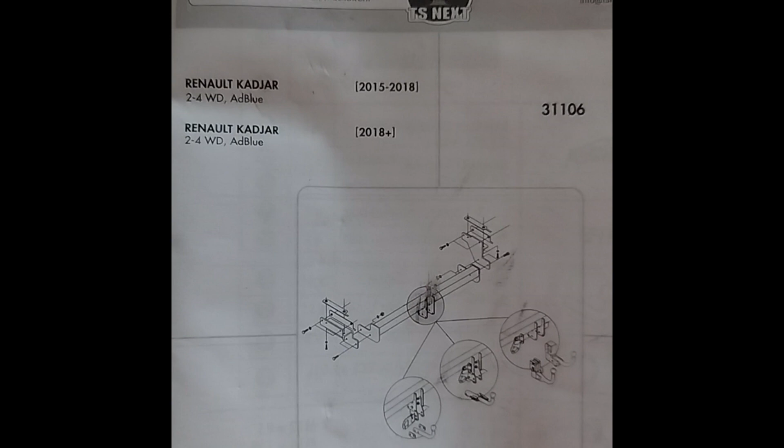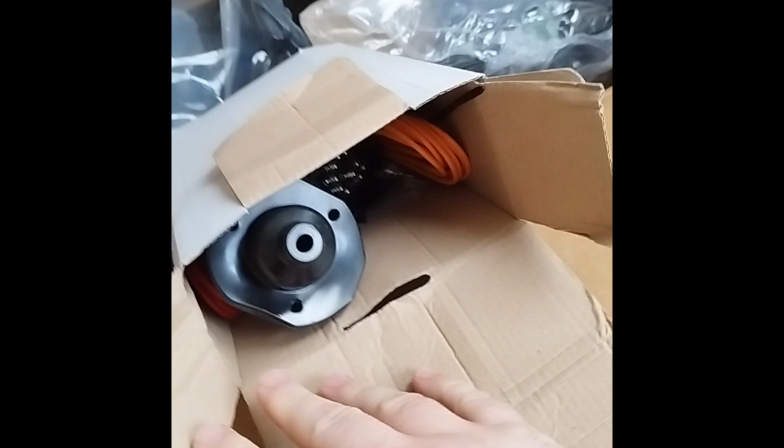Found these on eBay and on the Renault Kadjar Facebook group. Somebody had this fitted by a professional installer without a bumper cut, so I ordered it up. It's quite a lot cheaper than a lot of the other stuff. Came from Italy, it was £180. Came with everything you need basically to get started. I was really impressed, it came within a week. Comes with all of the electrics and CAN bus and everything, but I'll probably not do that in this video today because I'm under a bit of time pressure to get it taken apart and put back together again before I pick up the wife and kids.

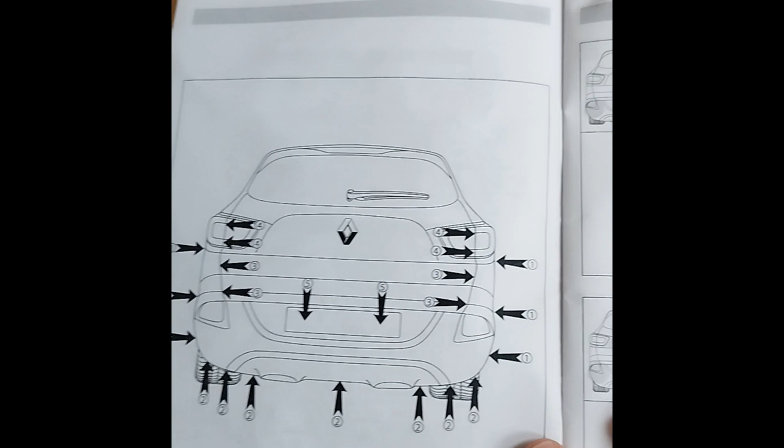So I'll do the electrics separately, I think. Put that out the road just now. But yeah, the instructions actually look pretty decent. People have said that the instructions aren't that great, but I can see it seems very well laid out. Sorry, just getting to the right page, but it's got a picture of the Renault Kadjar, shows you where all the screws are, what you need to do, so let's get on with it.

First job is to get the light off, and I think it's just these two screws here, but it does imply that there's a screw in the side, so we'll find out. Looks like star drivers, so yep. So there was a sneaky wee hand screw in the side of here, see that? Focus it in, yeah, that there, it screws onto that thread there.

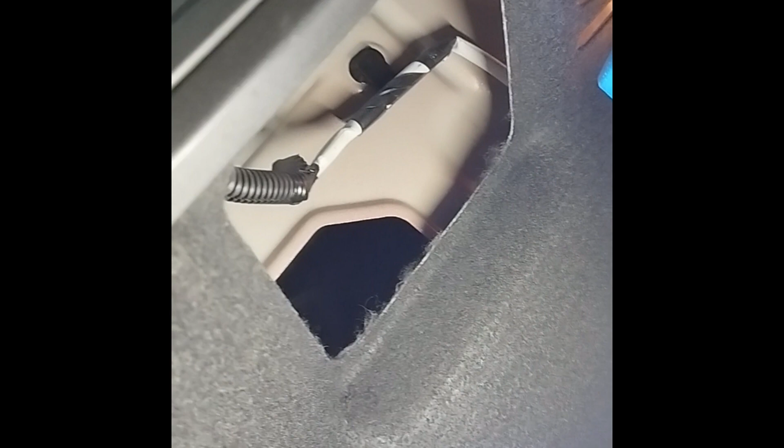So I just unscrewed that over there and it just came out the top of that hole there, so that's good. I've taken the opportunity to clean inside of the light bays there with some wet wipes, and the back of the lights just - oh boy, in a rush to put it back together again, so get rid of some of that stuff in there. Yeah, going to be very methodical. The screws for the lights are going in this empty toolbox I've got, so that's the screws for the LED lights, and then next I need to take out all the screws and pop rivet things.

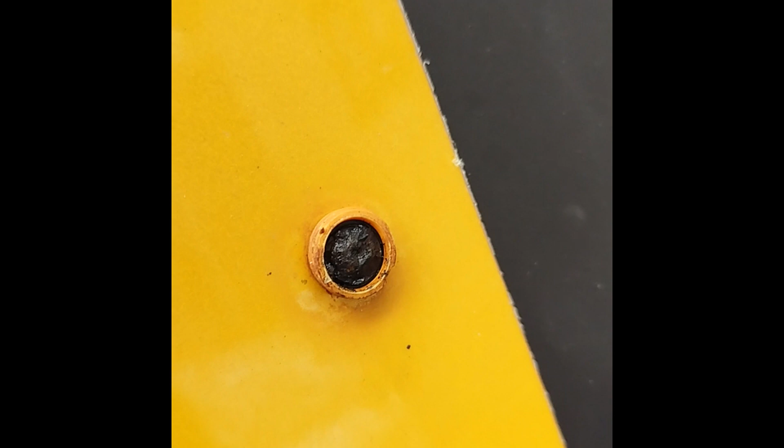Okay, so there's screws behind the bumper plate, so that's coming off next. It's always something that comes up to slow you down, so feckin' glad I started with the number plate. It's completely rusted on, there's no head on the bloody screw. It's completely rusted away, both sides.

So I managed to get one of the screws out and swivel it out the road. That's the two screws out of the bottom here. I am thinking the rest of the screws are underneath. I don't know if you can see that. I was thinking about jacking it up. I may yet do that just to make it easier.

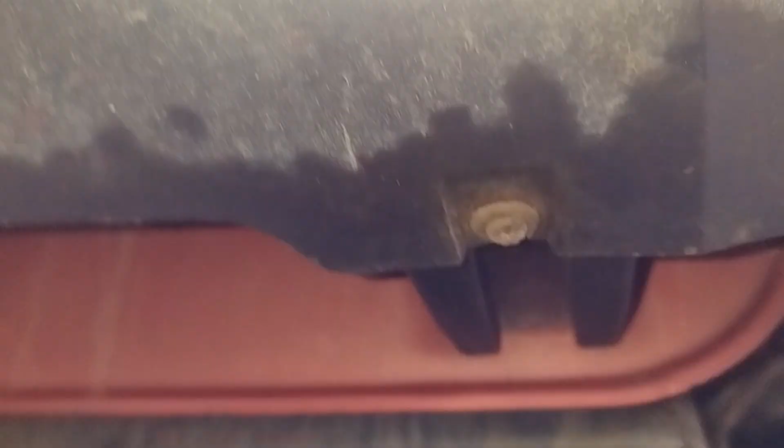So I've got the same problem underneath. I've got one screw out, but the first one I did came out fine, the rest are just corroded to shit. I'm going to have to get new ones before I carry on with this job. So yeah, top tip, make sure you're going to need some - it's a T25 Torx. So you need some machine screws to replace these ones, because unless there's ones in the car with a kit - let's go and have a look.

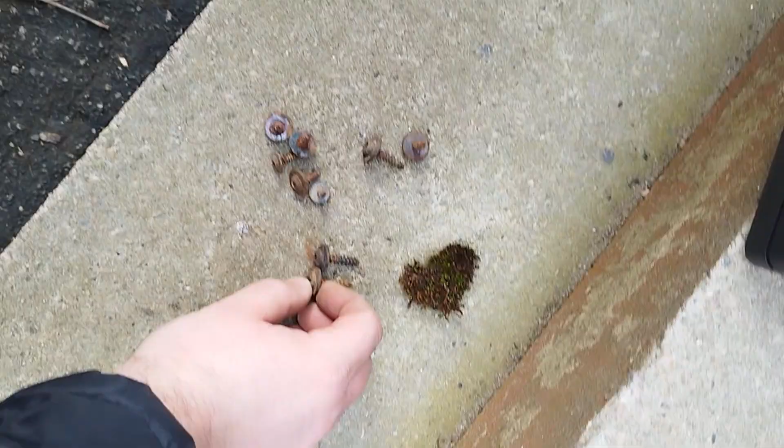Right, that was harder than expected. These are totally rotten. So the four bigger screws go at the edges connecting the wheel arches to the bumper, and these wee ones connect the bumper to the bottom. They are pretty rotten, I had to drill a couple out. Get in there. So I believe I've got all the screws out, I just took the last six out here, so it's a case of peeling it apart.

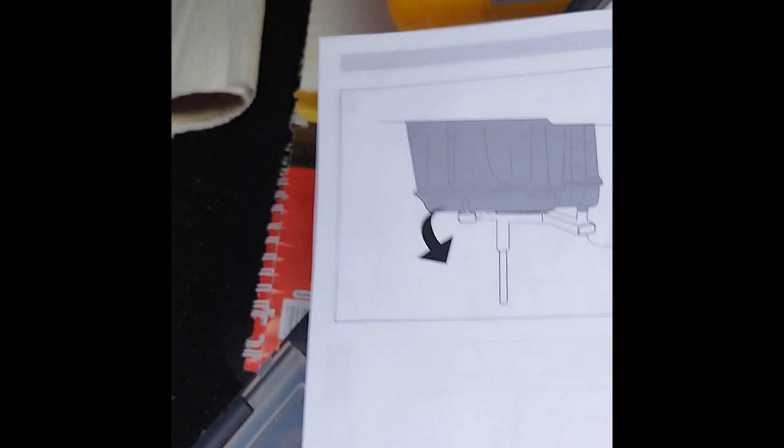Now the instructions are pretty good up until here, and then suddenly there's nothing about removing it. This is something about AdBlue, but I don't know what that is. But according to videos I've seen on YouTube, you basically start popping the wheel arch trim off first, and yeah, go from there. So let's try that. That was actually quite straightforward.

Got the big Bertha screwdriver in there, popped it out. You can see there's a clip, so like just here and just here. Get that off, and that's that out. That's as far as I need to take it. Do the same other side. Even quite tough to get off. I've got it off there, but it's pretty tight.

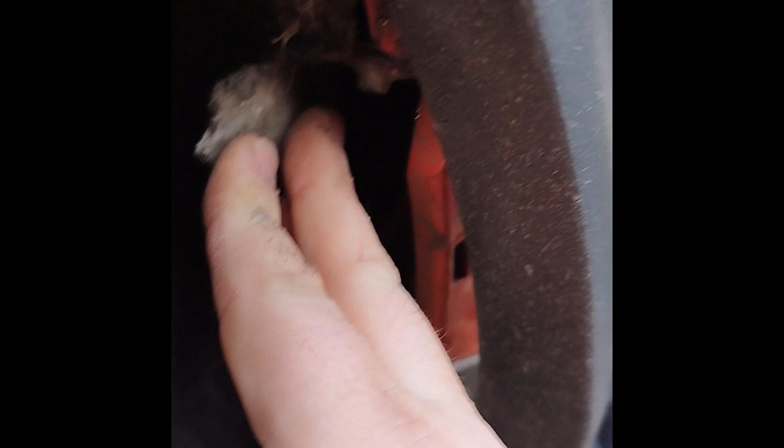It looks to me like there's another screw there holding that on. I can take it off. Yeah, a wee 7mm bolt in there just to catch it off guard. Actually, it's a star on the other side, so that means this bumper's been off before.

I did think that it maybe had a wee shunt. Matt Armstrong, you would be saying car vertical, but I've had this car for a few years. I'm pretty happy with it. The reason I'm putting a towbar on it is because I want to keep it a bit longer.

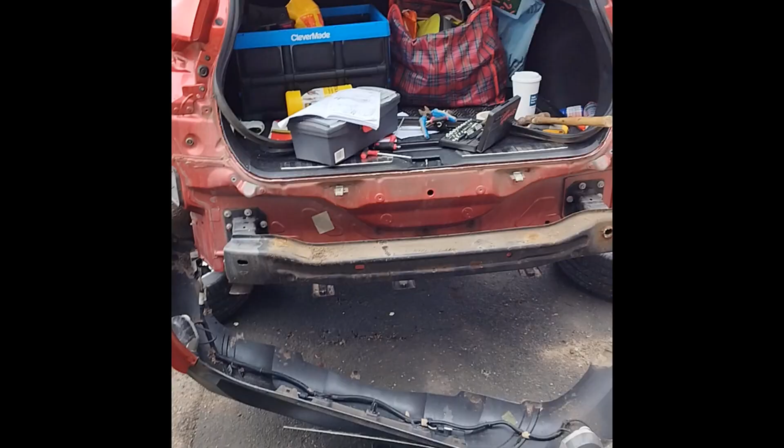They were difficult, seized up again as well. There was one last screw that doesn't want to come off, but it's kind of sitting there, so for all the hassle it will be to get it off, it's not in my way now. I've got access to the bit that I need to get access to, so we're good to go.

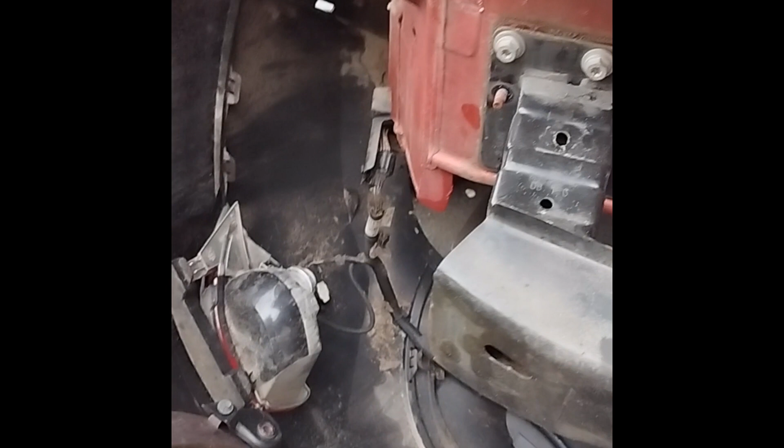Alright, it's pretty hard work. There's like 6 screws instead of 3 in the diagram. One of these actually shore off, so 1, 2, 3, well, yeah, 6 seized, fairly tight screws. Put a bit of WD-40 on it.

Right, now that that's off, we're now onto the jigsaw puzzle that is the Umbra towbar. Note to self, I should have used the box to lay on, save my back getting cold. Top tip, jack it up, use the box to lie on.

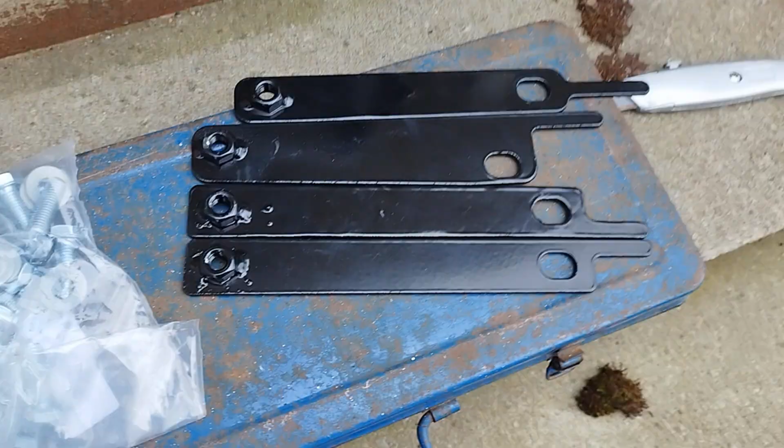Do that, so they two are the same. But that one's different, that's really concerning, because I would have thought they would be symmetrical.

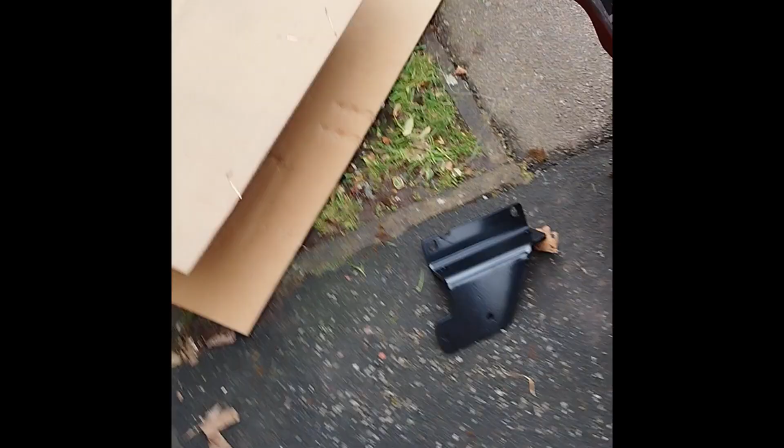Alright, I figured it out, because there is a right hand side, as you can see there. So this is the right hand side, and that's the left hand side, or the driver's side. And what I'm doing is, I'm guessing that that goes to the back so that I can screw into there and a bolt on top.

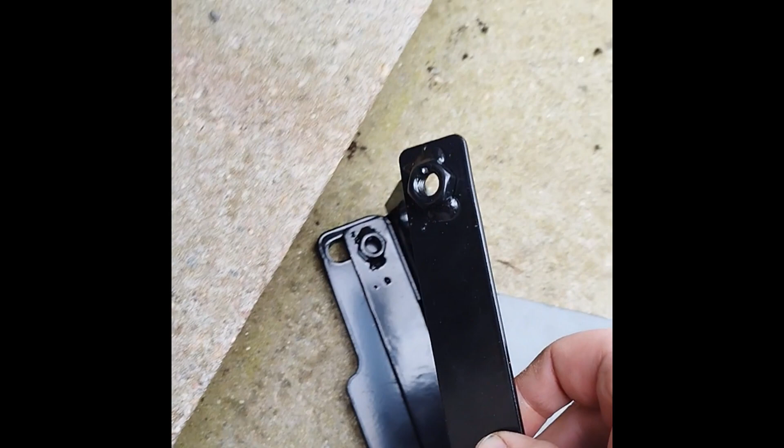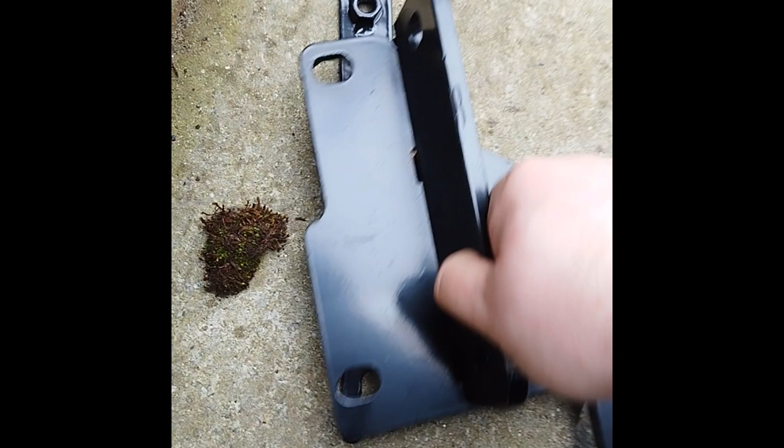So I do that with those two, they don't match. So they must be passenger side. I'm going to put that on there like that. It matches. On the other side it does as well.

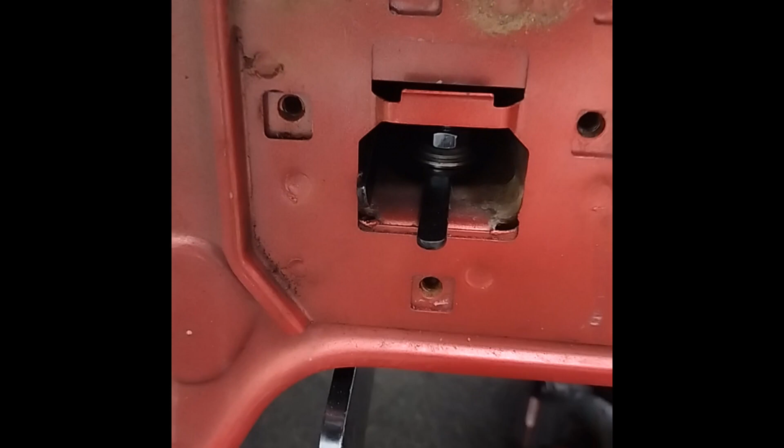Okay, it's going to be a bitch to get on, but let's give it a go. Right, that's one on. There's a bit of a footer. I eventually got on. This is the odd shaped one because there's a bit of an angle, and that's a straight one. So yeah, like you say, I've left it a wee bit fairly tight at the back, but loose at the front. I'll do the other side.

I might now be regretting leaving the bumper attached because it's... And I'm glad I jacked it up because it gives me extra space underneath, but I think I might have to take the bumper off to get full access at this now.

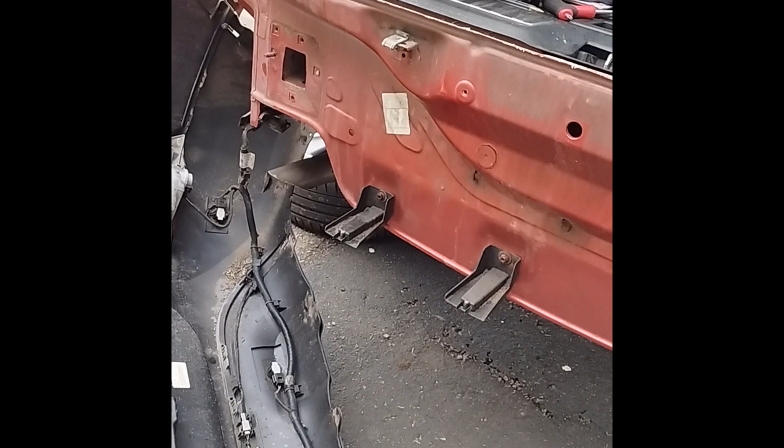Alright, I've got the other side in, it's not fully tightened, that's just loose. I think that's the right way around for that. So I see there, I've just fitted it in, nothing's tightened up, just checking it all for fit. Looks like it's going to work. This is a wee bit close. But yeah, okay, that's good.

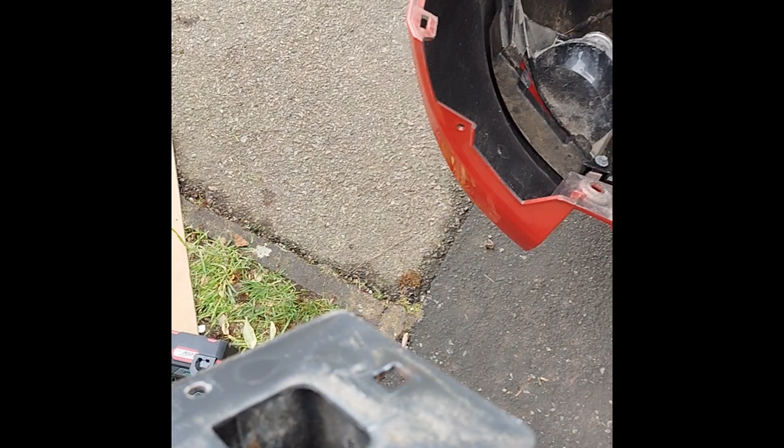And again, before I tighten it all up and secure it, just making sure the crash bar goes back on. It's not quite, as you can see there's a wee bit of a loop, but those wee lugs are more just to help you lever it around to get the back bolt on. So once I've tightened it up, I'll just hit them with a hammer and bend them out of the way. That should do the job. Right, I've kind of got it all tightened up now.

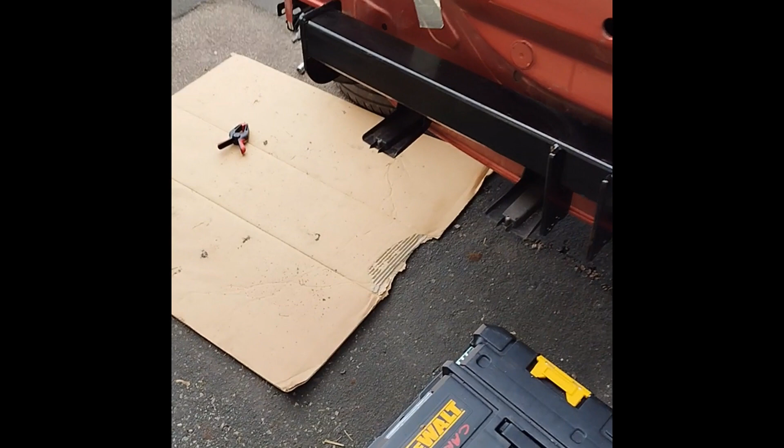The impact wrench comes in handy, but you kind of get all the way. The bumper fell off eventually anyway, kind of needed it out the road to get that bit tightened up. I can see that they've bent in anyway when I've tightened them up all the way, so they might be out the road now.

Right, so that bumper impact thing went on no bother. It's just a case of putting it back together now, I think. It hasn't mentioned much about fitting the actual tow bar thing, which is in this part.

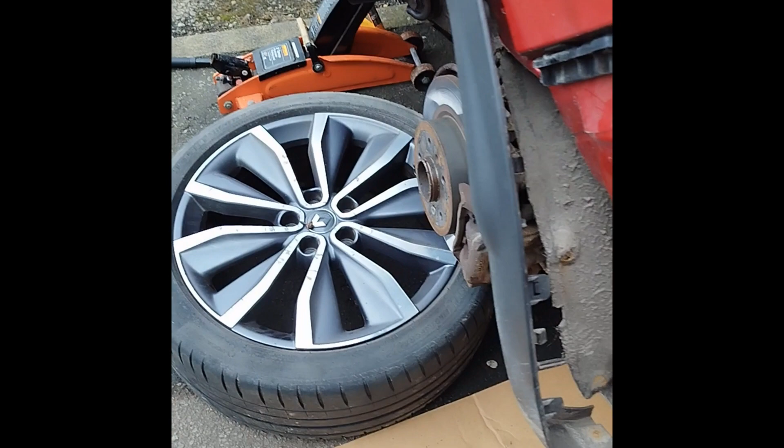Probably, I'm just going to push the electrics through, there's a wee grommet thing here. I'm assuming that goes through, so I'm going to push it all through there. I saw in Jim's shed you can pull out all that gubbins and get into that, so I'll push it all in there for just now.

Hopefully I won't have to take it off again, but I'm pretty sure that's the way into the car. It's got a wee thing, so I'll put a slit in that, push it in through there. That's what I think. Yeah, there's literally no instructions on how the last wee bit goes together.

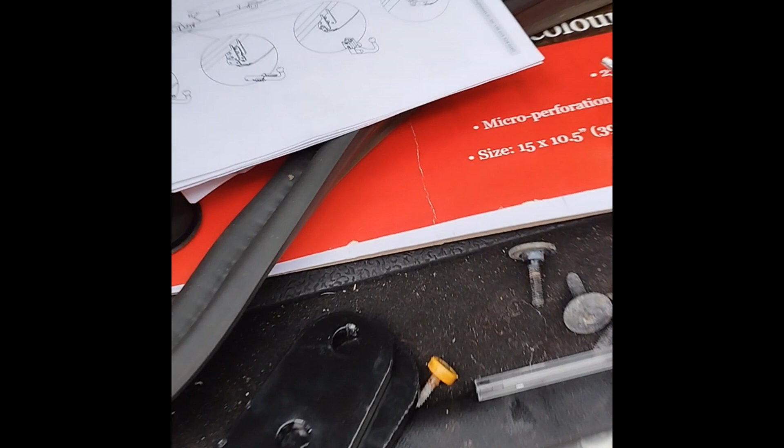I'm pretty tired now. I've got to put the car back together. So what I'm going to do is just put the wiring loom. I mean, that's literally it, but I can't see. Maybe I'm just tired, but I can't really see.

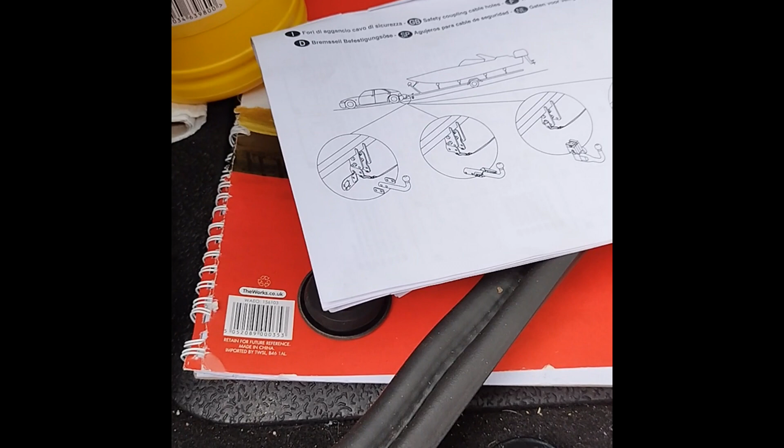Oh yeah, that thread's in there. Okay, maybe it does go in there like that. So that's got threads on it.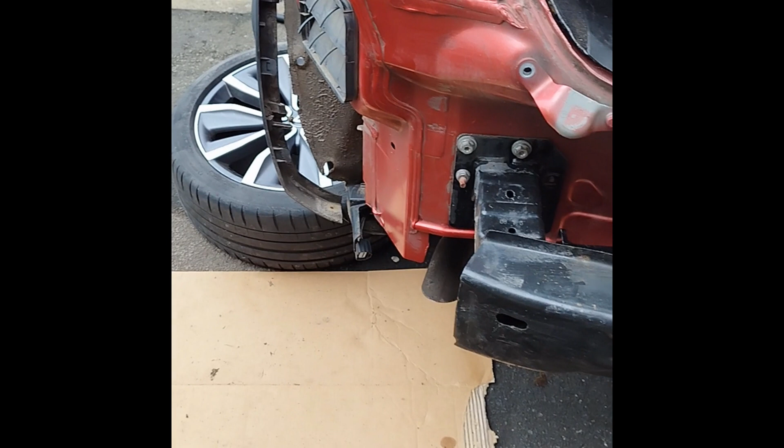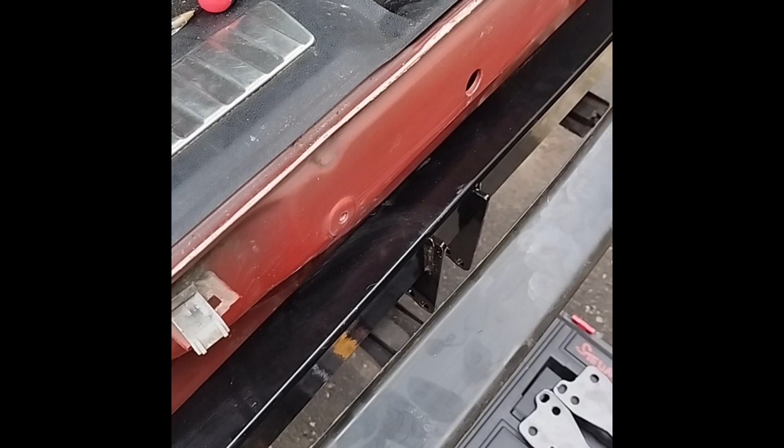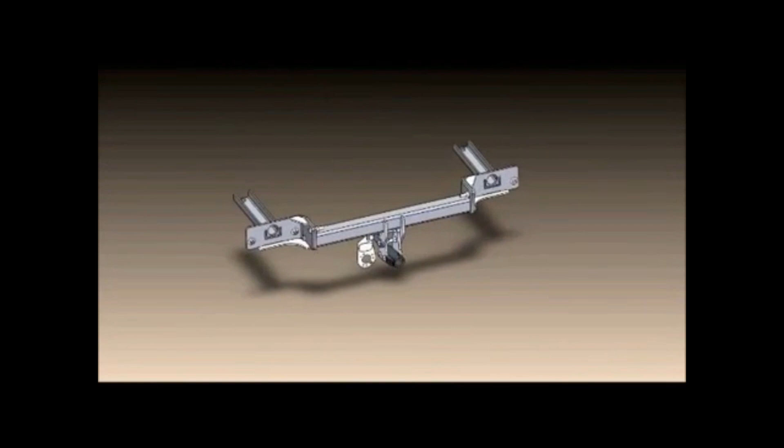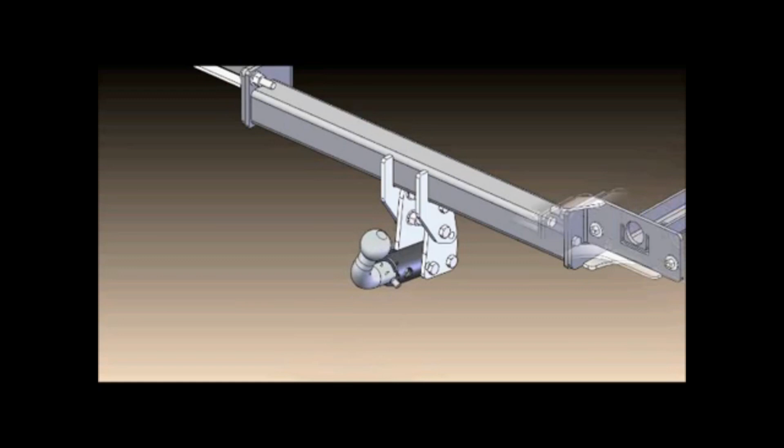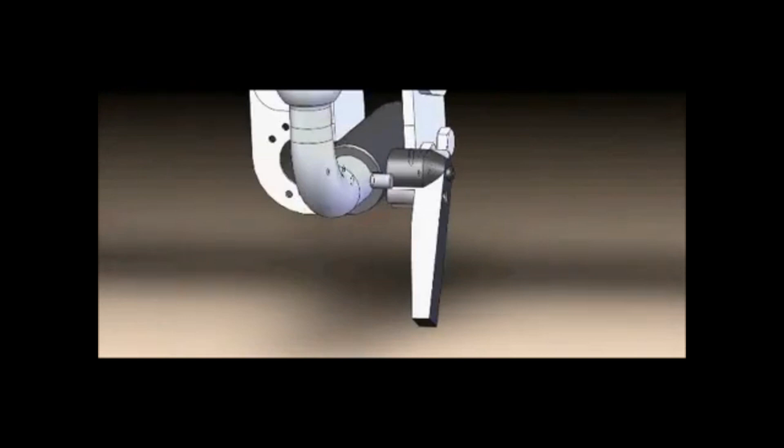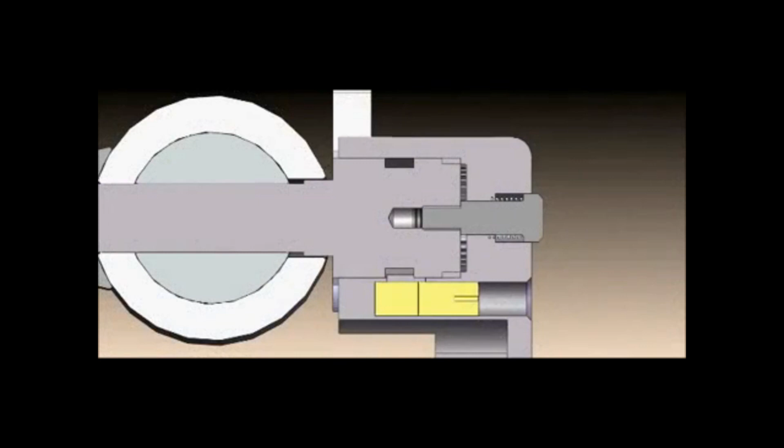So putting the actual detachable tow bar piece on wasn't too bad in the end, and I'm quite pleased with it. One thing I watched on another video was that some guys recommended removing the paintwork from the tow ball so you get a better clamp on the ball head, so we'll check that out at some point. Unfortunately I wasn't able to do that, so I put the bumper back on.

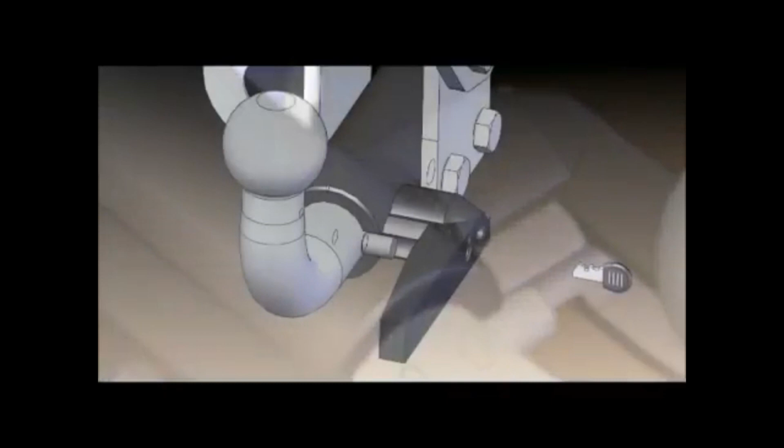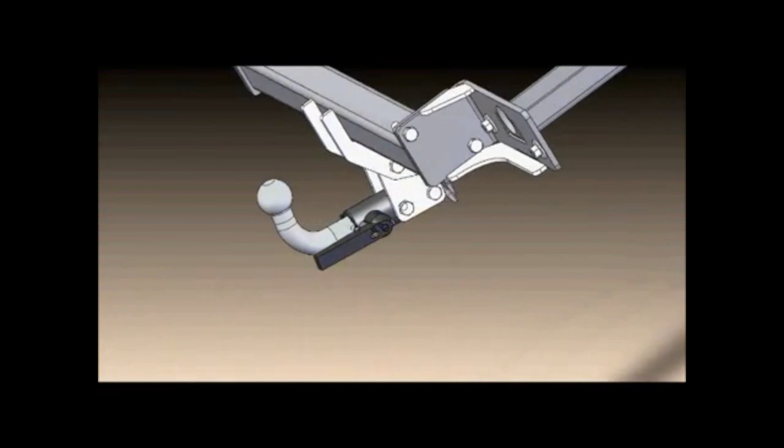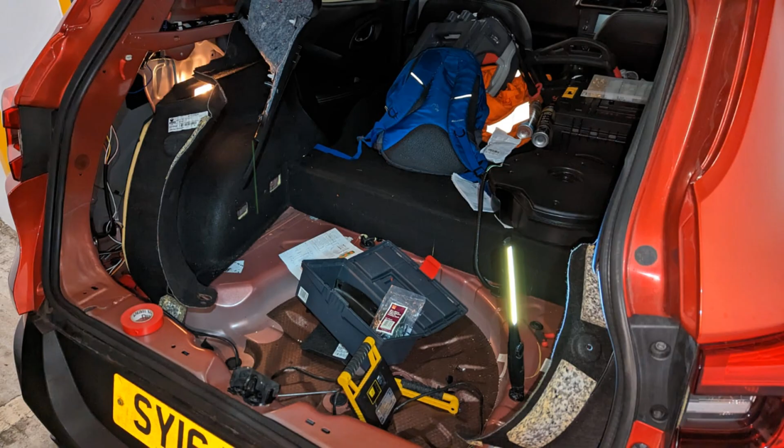A week or two later I was looking at how to do the electrics, and one of my good friends said that he had done it in several cars, so I kind of wimped out and got him to help me do the electrics with the CAN bus module that came with the kit. Unfortunately on a Nissan Qashqai there's a 6-pin connector block, but on the Kadjar there wasn't, so I had to Scotch lock into the wires, and because I was asking for my friend's time I didn't record it, as it took us about 4 hours to do that as well.

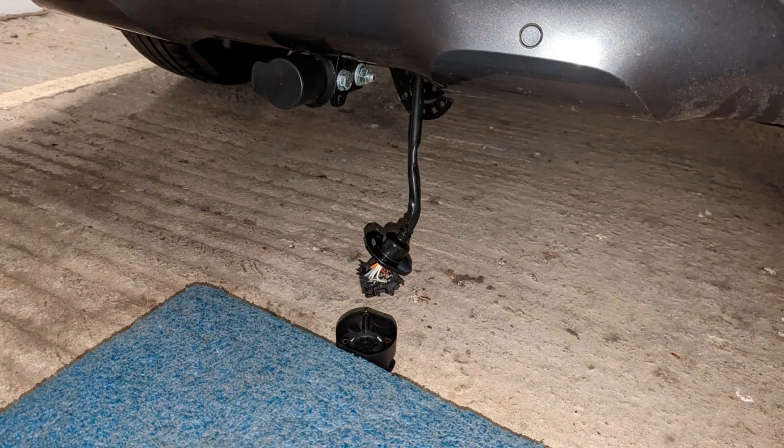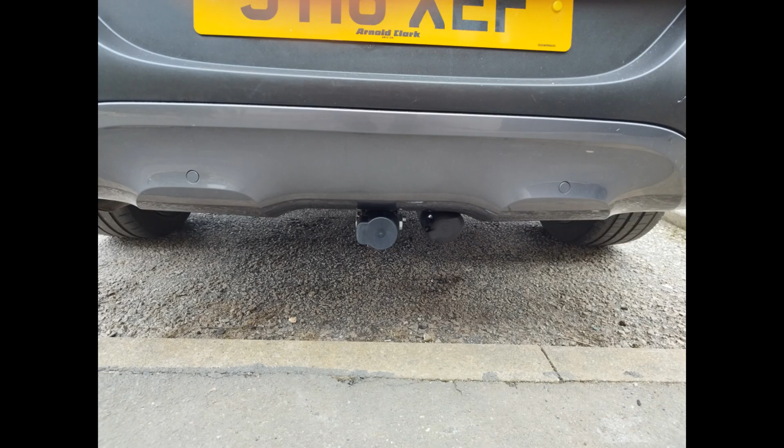So we ended up splicing into the wires, and actually the kit worked really well. I was pretty chuffed with it, and my lighting board had a fault and it detected that it was beeping, so it was a short circuit on one of the bulbs, so we sorted that, and now it's working great. We were able to tap into the fog light and the reversing light.

I think you might need that for a caravan. And yeah, it fits really well, and I've been able to get all my bikes on, and now I'm thinking about investing in a caravan. Hope that was helpful to you.